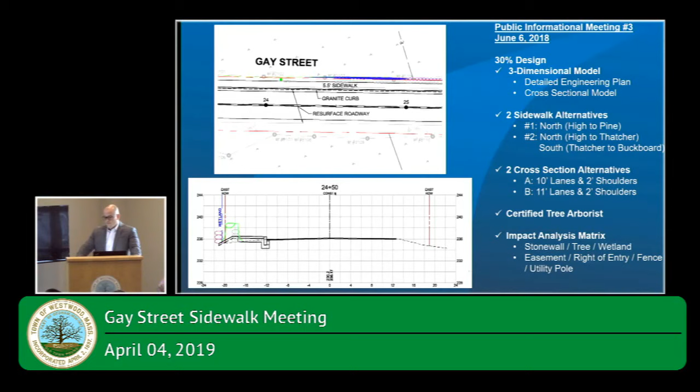One that was entirely along the north side, and one on the north side until it reached Thatcher, crossing over and staying on the south side, crossing Milk, and tying into the existing sidewalk up by Buckboard Lane. With those two sidewalk alternatives, we looked at a couple of cross-sectional alternatives through the corridor. So we had four alternatives altogether, put them into a matrix so we could present to you the impacts associated with each.

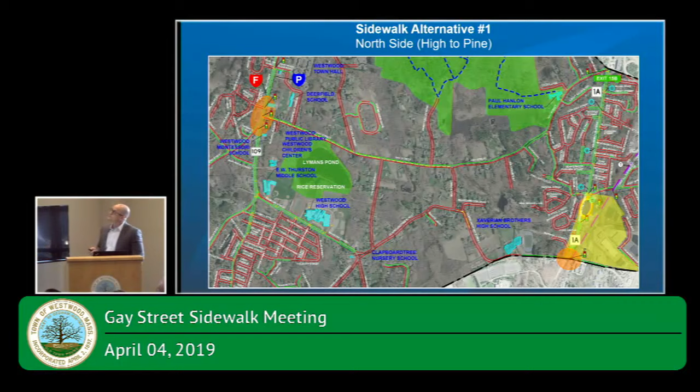Just to recap on the different alternatives: on the first one, you can see the green line along the north side of Gay Street, the entire length, representing a new sidewalk along the north side. Alternative 2, you can see where we'd cross at Thatcher and continue along the south side, crossing Milk Street, and tying into this existing sidewalk here. Then if you were to continue along, you'd cross again at Pine Lane at the existing crossing.

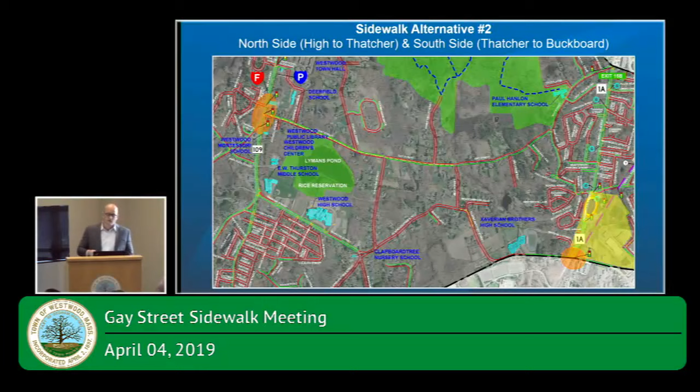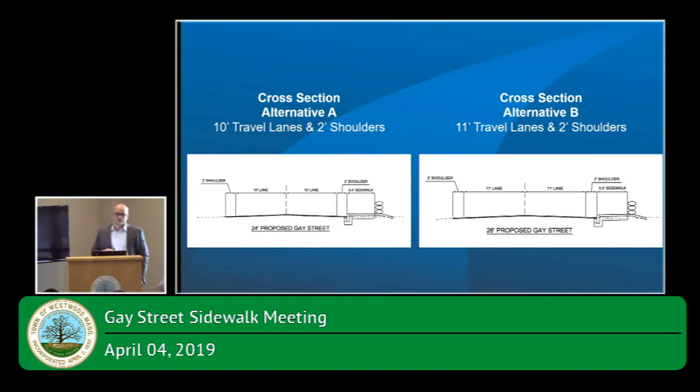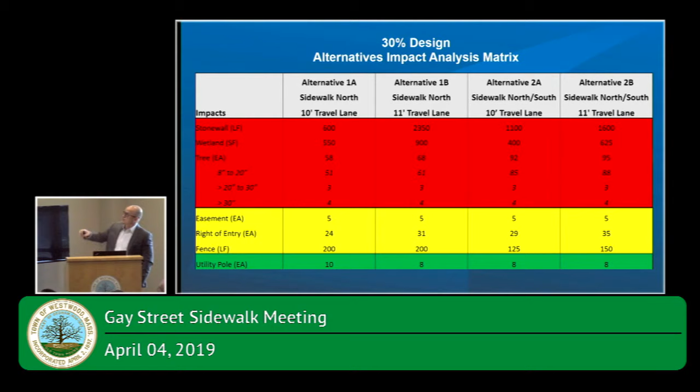Next thing we did was basically took out the two 11-foot travel lane alternatives and put the two 10s side by side. So now we have the two sidewalk alternatives with 10-foot travel lanes. And as you look at these two, again, the main difference is the number of trees, 60 to 90.

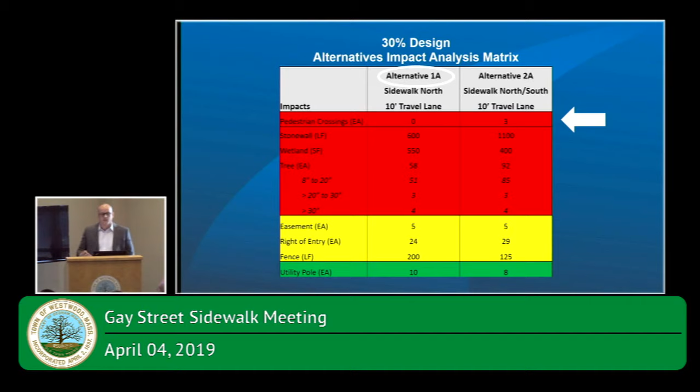We took this one step further. The top row shows the pedestrian crossings. We've got to also look at this not just from an impact perspective, but from a safety perspective. With alternative 1, if you were walking along on a sidewalk from High Street, you could go all the way to Washington and stay on the same side of the road. With alternative 2, you would cross at Thatcher, cross again at Milk Street, albeit a side street that's stop controlled. At our early meetings, we heard that that was a major concern of the residents, to make sure we don't have people trying to cross Milk Street. You'd continue along and cross for a third time at Pine Lane. So once we took account for that pedestrian crossing, it was really pretty clear for us to recommend alternative 1A.

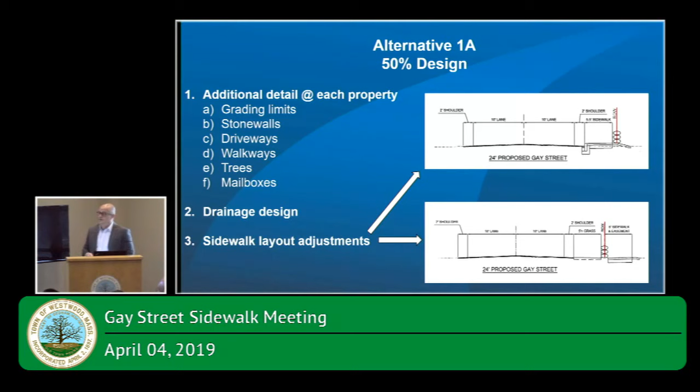So just a brief summary of that evaluation of different layout alternatives. There are 35 properties along the north side of Gay Street, but we have challenges, as we've continuously talked about, the theme with resource areas, topography, whether you have a steep slope up or a steep slope down, location of houses. Not every house is set far back from Gay Street. Many of them are up close. Once we took a look at those challenges, we had properties in which Todd and his staff were successful in contacting all 11 property owners, and found that 3 of them were okay with looking at this type of alternative, where the sidewalk would fall behind the stone wall within an easement. This is just west of Fox Meadow. So overall, we'd have 1,000 feet, about 12% of the project, where the sidewalk would be able to be installed behind the stone wall.

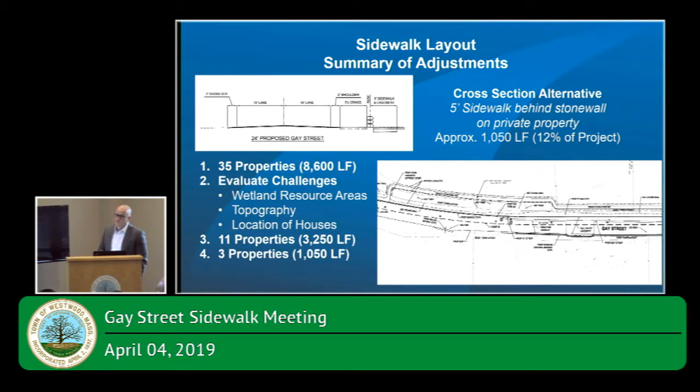So as Todd mentioned, we met with the state. We got feedback from the state. The recommendation was that pedestrian and bicycle accommodations would be required to get state funding.

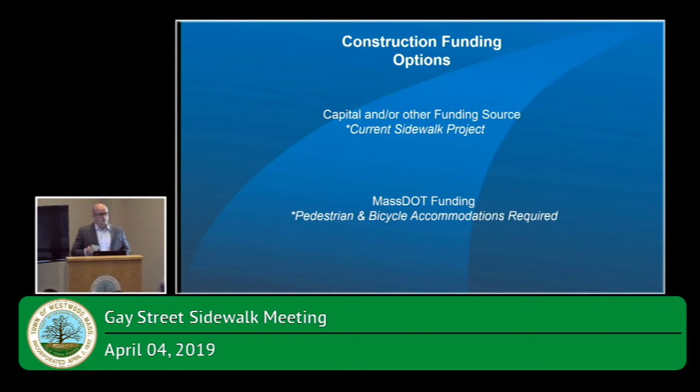Don't want you to fall out of your chair. I did bring a sketch of what that would look like so everyone can see. We need to do our due diligence to show you what it would look like to incorporate bicycle accommodations.

This is a recap of where we currently are, 50% design, current sidewalk project. The pavement out there is about 26 feet wide. With a sidewalk alone, a 5-foot sidewalk, we'd have about a 30-foot roadway, so you can visualize about a 4-foot increase to the roadway throughout the corridor.

Here's the level of assessment on the impacts. These are a little different than the previous slide because as we went from 30 to 50 percent design, we reevaluated those impacts and refined them a little, but they're still pretty consistent with what you saw on the previous slide.

This is what DOT would expect to include a bicycle accommodation. Again, up top, you can see the 26 feet of existing pavement, and these are two alternatives for bicycle accommodations. The one in the middle is what we'd call an on-road bicycle facility, basically a 5-foot bike shoulder with a painted bike symbol and a painted arrow every several hundred feet in the roadway.

The one on the bottom would be an off-road facility. This would have a path shared by pedestrians and bicyclists off the road. You'd need to provide a buffer from the road, as well as enough shoulder on the opposite direction for an experienced rider that wanted to stay in that direction.

The most important thing to note about these sections is that the distance between here, your right-of-way limit, to here, from Milk Street to the east, is 40 feet. So this would be 38 feet of that, and it just wouldn't work. The impacts would be detrimental to the character of your roadway.

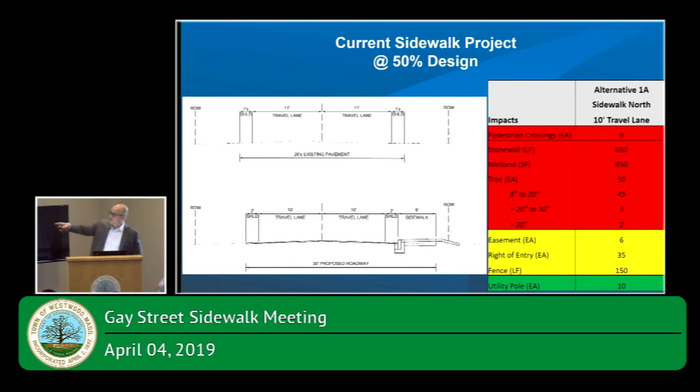The rock walls generally are at the right-of-way line, but that doesn't mean they're not impacted with a 38-foot section. The wetlands and the trees are also within the right-of-way line, so the impacts are going to be much more. These are all going to go up dramatically if we went from 30 feet to 38 feet in widening of the corridor. So again, this is not what we're proposing by any means. We're just trying to give you the perspective of what the state would expect as far as a bicycle accommodation and what that might look like.

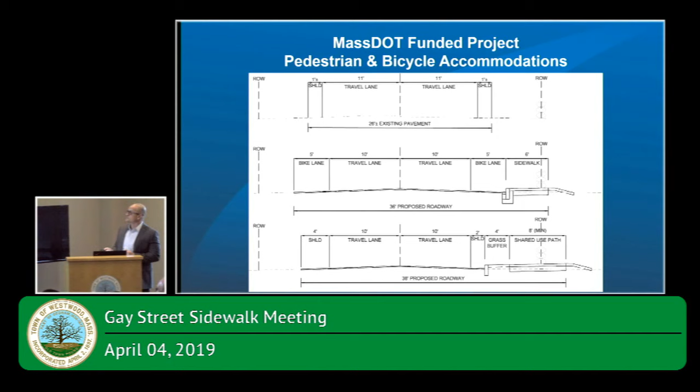So next steps, as Todd mentioned, we'll be reporting back to the Board of Selectmen to make sure we give them a summary of all the impacts, all the input and feedback we get tonight. We do want to report back our feedback from the state, because that was part of the due diligence, to go out and try to find other options for funding.

This is just a snapshot on the left. You can see the next steps of advancing this project from 50% to 90%, go through environmental permitting in spring and summer, hopefully finalize in the fall, go out to bid the job in the winter, and construct in 2020. The option on the right is with DOT in that section, and I can tell from the reaction I got from many people's looks what they think of that timeline, but we just wanted to present the facts and the data to you so you can see.

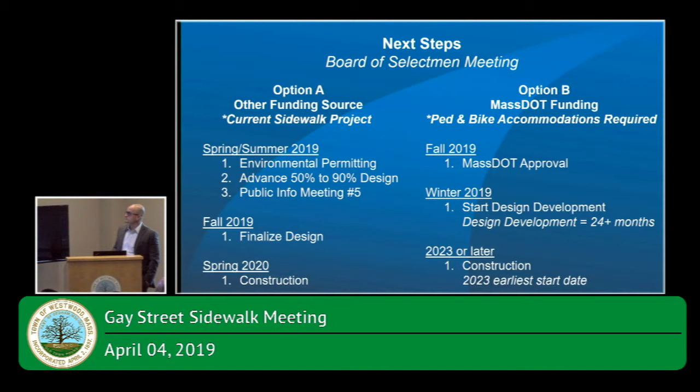And with that, that's all we have. So if you have any questions that we can answer, if you have detailed questions you want to talk about in front of your property, specific things, we've got 3 stations set up with plans, and we can work with you for as long as you'd like.

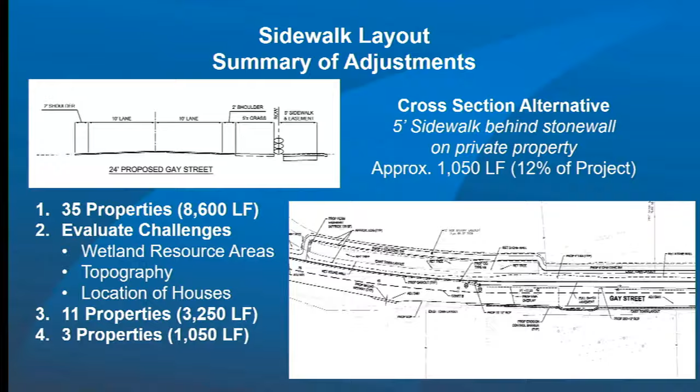Yes, I do. Just to give a quick response, the reason you weren't contacted was, if we go back to this slide here, when we looked at those three challenges, the topography being one of them, because of those steep slopes that you mentioned, we knew there'd be substantial impacts. So because of that, we ruled those properties out as feasible alternatives.

Ellen McFarland, same property. Are you going to replace the trees that you cut down? And as to the stone walls, are the character of the stone walls going to stay the same? Because that's really important to us.

I'll tell you, it's going to be a million dollars to redo those stone walls. We had them repaired at great expense, and that was just repairing a few of them. So I know what it takes, but it sounds good, it's a big job. We own a wall that is probably this tall, it's all wall that goes into the bank. That would have to be totally redone, and that's a long wall. It goes from Wheelers to, I don't even know how many feet of wall that is. It's a big wall. And - yes, and yes.

And so you will replant the trees? The idea is to find places for trees to mitigate.

So when you take property from these landholders, do they get a tax refund? I don't think there's any taken. But it depends, when we've done it in the past, like the sidewalk project we did for the Downey School, we met with the residents and gave them two options. One option was they could get paid cash for the value of the land as appraised by an appraiser, or we would give them a receipt which they could take as a tax deduction.

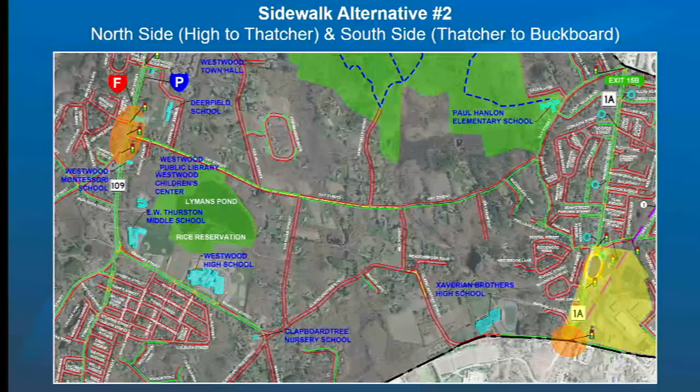The green is showing the proposed sidewalk for each location. The primary reason for Gay Street is that the red line, today, if you looked at it from Deerfield, is red all the way, and then you've got a section of green this way — so there's a gap between the two villages. That was the focus: trying to connect the two villages with that sidewalk connection.

Theoretically, yes, you're right, but practically there are other areas that would be more important, because people are pointing to safety, safety. Yes, I'm not opposed to safety — that's foremost for everybody. But if safety is the issue, then we should focus on other streets which are smaller, denser, and riskier.

Thank you. Just to comment on the particular choice of Gay Street — I think the reason we focused on this is that it's a major artery to get to the other side of town, to Route 1A. If you put a sidewalk on Thatcher or Milk, you'd simply be dead-ending at both ends, whereas Gay Street provides connectivity to the other side of the community.

Hi, Bobby Wells at 375 Gay Street. I haven't been contacted at all, and I'm not happy about that. And I feel like the Gay Street residents haven't really been heard.

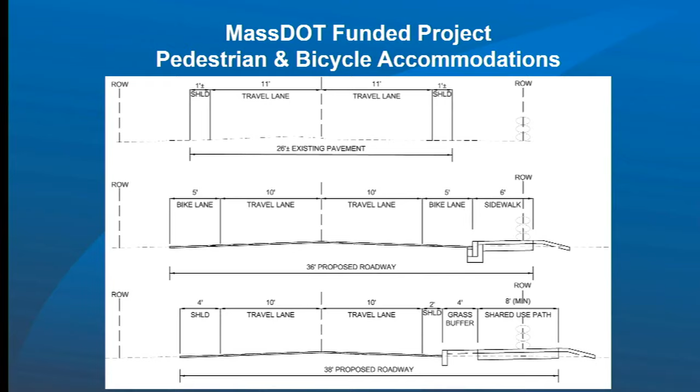I'd like to just clarify, the intent is not to include bicycles in this project at this point. This last slide that I had for you was simply to show what it would look like if it were a state-funded project. Right now, we're not going down the path of a state-funded project. That was the intent of this slide, just to show you - in case someone would raise their hand and say, I'd really like to see the state fund this project, this is what it would look like if the state funded it. So the intent is not - what you're proposing is not going to have bicycles on this. This is what's still being proposed in general, yeah.

So, 6 foot, just one sidewalk. Question - to the extent there are wetlands, and there are clearly wetlands there, will this have to go before the Conservation Commission for this project? But it's premature to say at this stage, right? That would be one of our next steps this summer, to go through that. Thank you.

I have a question. You said that there was no reason to contact us. If you're going behind the Greppens' wall, we own the property right next to the Greppens - it's called Gay Street Rear, there's no address to it. You would have to go behind that stone wall. We own that stone wall. So nobody's ever contacted me about that. That's more than the Greppens as far as frontage. So, hi, contact me, please.

Good evening, I'm John Rogers, live at 35 Wentworth Street. I chair the Conservation Commission, and I thought maybe this is a good time for me to speak up about wetlands issues, which are there, not insignificant. But I did want to say a couple things.

First of all, I have been following this. This is the first of these meetings I've attended, but I think they've done a great job at boiling things down in a quantitative way about what the alternatives are. There's a lot of qualitative issues that people are talking about that I think they can get to in the furthering of the design.

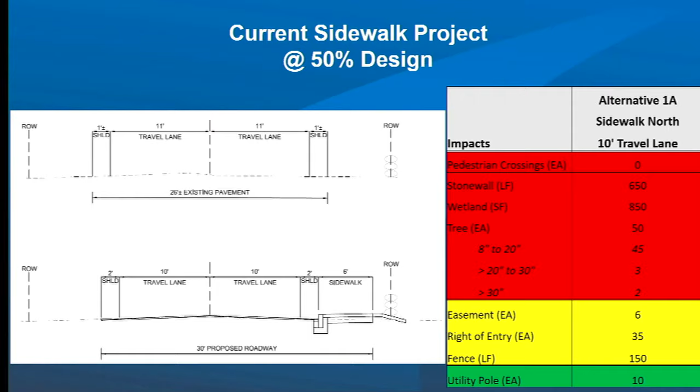To answer your first question on the bicyclist, on this side of the road there would certainly be no change. It would be the same as it is today, at edge of pavement. Yes, this would be a little more challenging for a bicyclist, having a 6-inch vertical curb next to that if they're heading down Gay Street. Basically, there's no improvement for bikes, no. With a corridor like this, this is what it looks like for safe bike accommodations. It's a 38-foot roadway and a 40-foot right-of-way.

No, I didn't think so either. And on your question about speed data, we had tubes put down in the road, the two little black tubes you see. We have that data, we can certainly pull that together. I don't know off the top of my head, and I know the speed limit varies, but we do have that data.

Jeff Lawrence, 587 Gay Street, right across from the McFarlands. I have two real issues with this. Even though this isn't being proposed to go immediately in front of our house, but on the other side, I totally agree with the comments about the aesthetics. I don't see how you can, all at one fell swoop with one contractor, reproduce the evolution of 200 years of stone walls. It's just impossible. I don't think you'll ever be able to reproduce what we've come to enjoy after all these years, and I've lived in our house almost 30 years. I think you're going to destroy what is truly, as this gentleman said, one of the most beautiful streets in the state of Massachusetts.

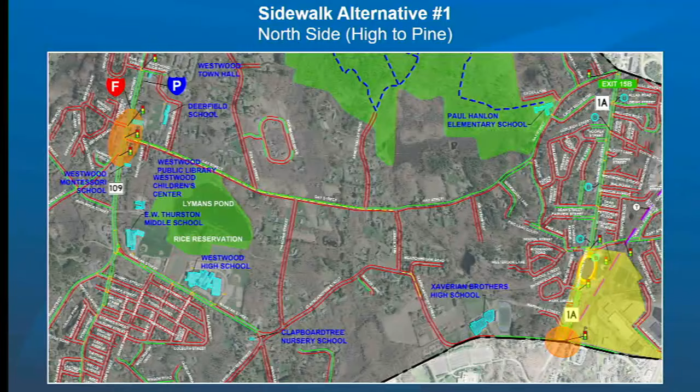Do we have any crosswalks to side streets in the design yet? No, not yet. So one of the things we would be looking at as we advance the design is trying to look at some of the side streets to see if there are opportunities to put in a crosswalk so that people coming down Thatcher could get to the other side. If there are people in the room that want to see that, if there are opportunities, if it's safe, those opportunities are there. They're not incorporated in the design yet, but that would be something we would be looking at.

No, I mean, I live on Gay Street, 145. So I will have to cross Gay Street to go to the other side of where there will be pavement, right? There won't be pavement on both sides, isn't it? Right, so effectively I still have to cross, which is way more dangerous because people do not stop, even at the four-way stop signs they do not stop. They do not obey, like they don't give right of way. People just go. So I'm not trying to be opposed, I'm trying to look into the actual reason, which is safety, and trying to find out which is the best way to enhance and ensure safety.

One more thing I would like to point out: the trucks. It's very easy to block trucks, we can generate a no-permit for trucks to enter that road, end of story. Because, for example, you go down Williams Tunnel, you cannot go there. It's big, bold letters written: hazardous materials cannot go there. Same way we can do that. If you have a big cement truck, please use a bigger road. This looks bigger, but it's still a residential community. So the speed limit across the United States is 30 miles per hour, but on Gay Street it's 40.